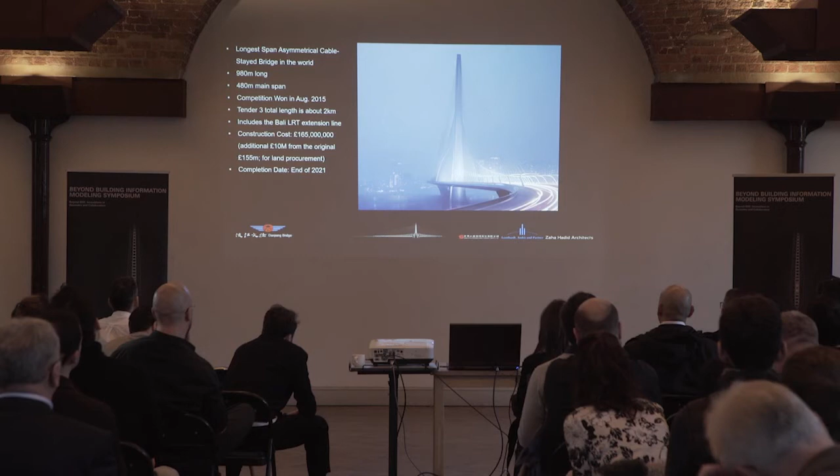Basically, just a little bit about the bridge itself. It's just under 1 kilometer long. The main span is half a kilometer. Completion date 2021, not happening. Reason being, and I'll mention this towards the end, has to do with the contracting process that had many, many difficulties due to the nature of the way that contracts are done on public projects in Taiwan, dealing with quite complex information sets, such as this one.

And what you have is this large bridge here, and the bridge is designed for car and vehicle access, but also for a light railway, roughly a tramway system that will be deployed in the middle of the bridge. So this is a span here between Danjiang and the Bali, which are basically on an estuary of the Tamsui River in the north of Taiwan.

So how many people here have seen the movie called Margin Call? If you haven't seen it, you have to watch it. It's about the 24 hours that basically caused the global financial crisis in 2008. Anyway, in Margin Call, there is a guy played by Stanley Tucci, one of the bankers who gets let go, and he says, in my previous life I was an engineer.

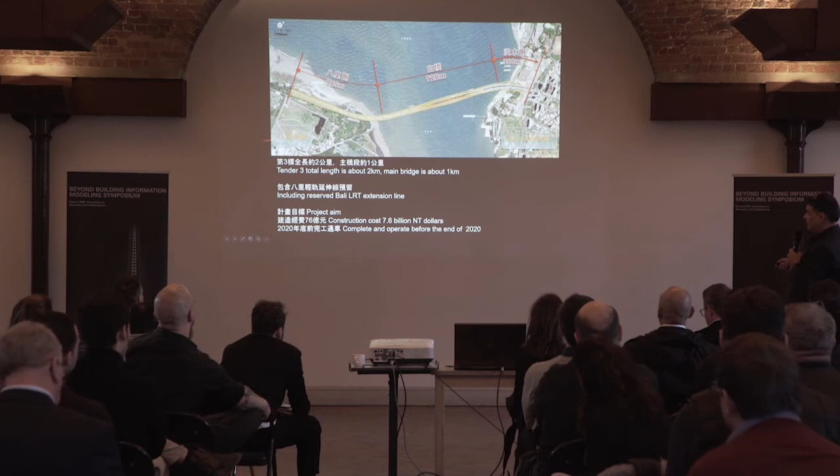And he tells a story of how he built a bridge in Ohio that allowed to connect people and saved, I don't know, an hour of travel time, and he calculated how many millions of kilometers of driving over those years had been. So this is exactly what this does. To get from Tamsui to Bali, I think it's like an hour and a half to drive all the way around to the other bridge, and this now allows you to close that loop. So it's a very important piece of infrastructure, even from an economic point of view.

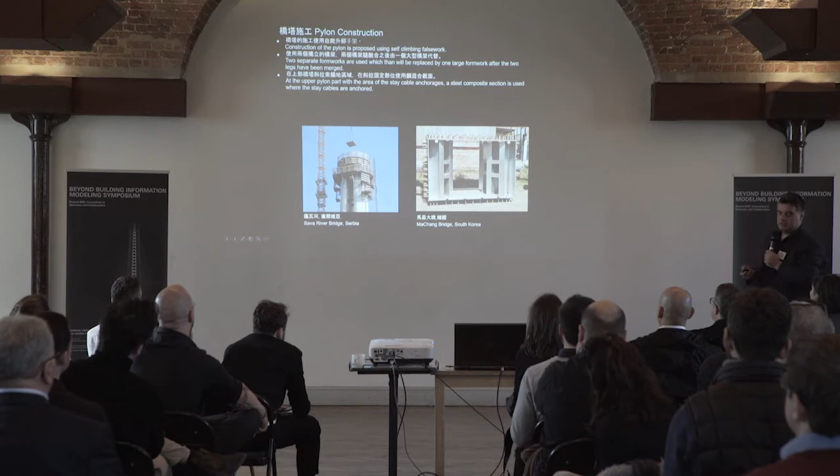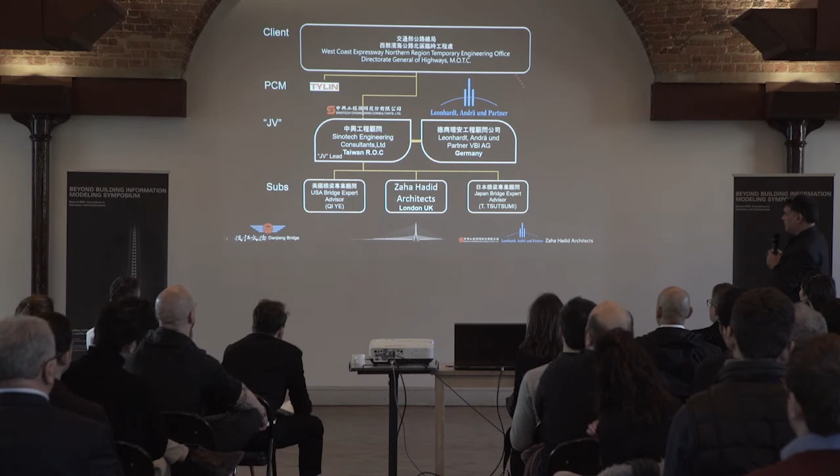The second point also, there was an issue of immediate constructability and explaining to the people in Taiwan how we were actually going to plan to build this so that in the end you could come up with a complete system where there's that complement between the bridge and the mountain. And there we go, now we can read this. So this was how this was arranged.

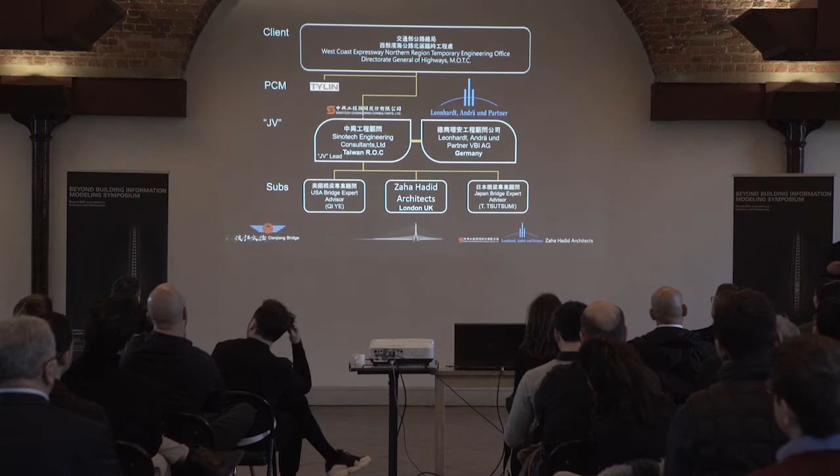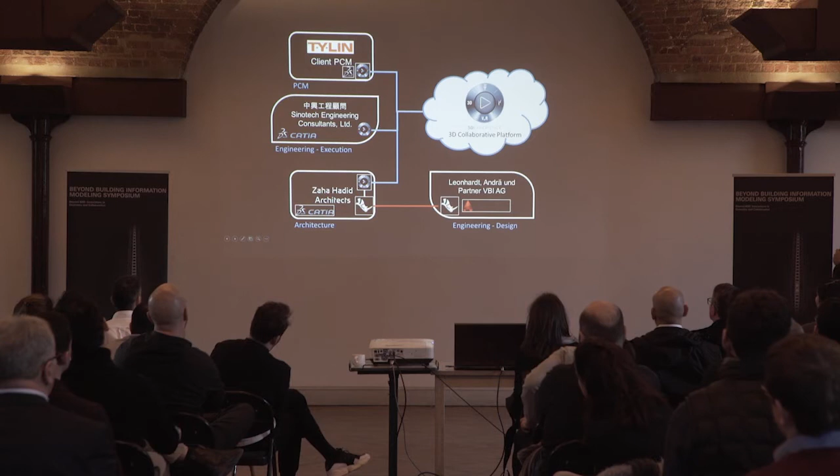So we have here a client body, which is the Ministry of Transport with their onboard engineers, TY Lin, a very famous engineering company. Because it's an engineering project, it had to be led by an engineering team. So the joint venture is between engineers, and as I mentioned, we played a very specific role that was not just the design, but also the whole 3D BIM integration process. So the idea was that we would have a design team that consisted of the three companies, Taiwan, Germany, and London, to provide a model.

And this model, it'd be nice if this thing went forward. Oops, I think this died now.

There we go. That we would then release it from our private workflow. This was what we were proposing to the Ministry of Transport, saying we have a master model that we can share with you.

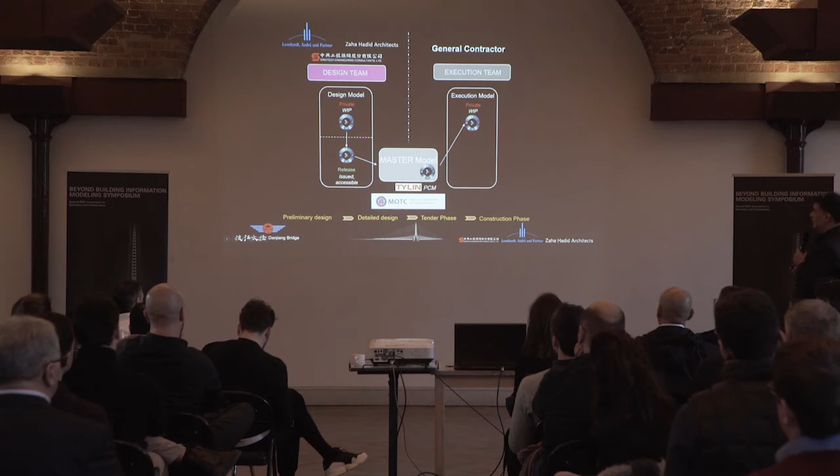And this eventually, when you procure a contractor, which they have finally done, and after many, many problems, which we'll explain to you why, you would actually then have what we called a master model we can share, where the contractor takes it on board and turns it into the execution model that is then released to subcontractors.

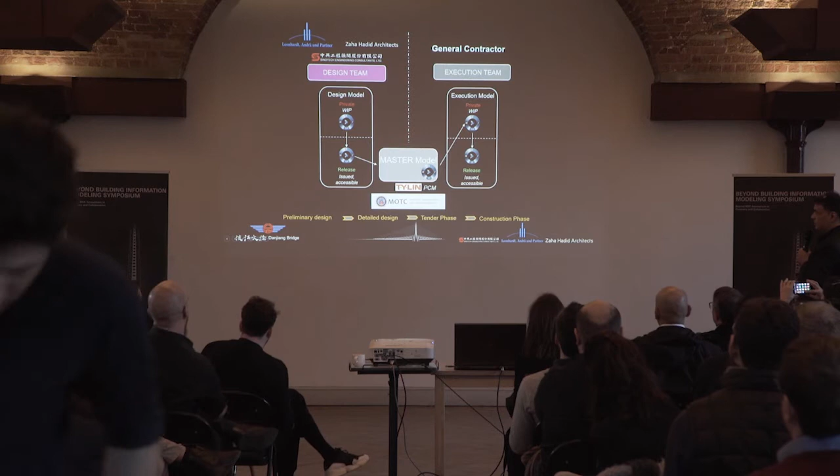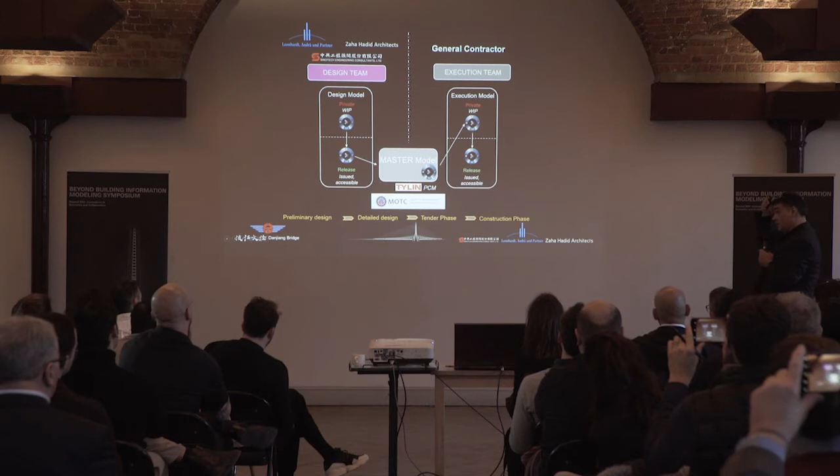So in order to get, I remember Boeing, right? We want to have authoritative data that we can manufacture from. In order to get the return on the investment that we are doing on building these kind of models, we want to be able to use it to the hilt, right? So this would then come out to fabricators, to the concrete contractor, and so on.

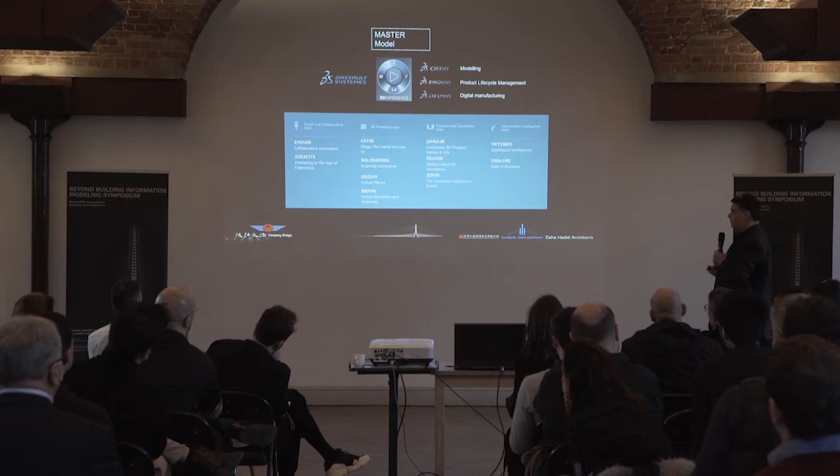So we looked at what platforms are available that are fundamentally understood in engineering. And one of the things that was very important is that, for us, we have a set of skills and, shall we say, tradition of using the CATIA platform in Zaha Hadid Architects. It has its advantages. Other tools have other advantages. One of the things also that we found that was really fundamental is that, without really asking, Sinotech was using CATIA as well. And they were quite interested in looking at this kind of distributed collaboration.

So the entire party here that you're looking at would not have happened if you'd not had two parties on either side, Zaha and Sinotech, that were willing to work together on a common platform basis. If you don't have that, you might as well not even get started, because it's just going to become a major headache. So we talked to Dassault, we talked to Jeff and to Patrick on our side. They then talked to their counterparts in Taiwan and looked at what is the infrastructure required.

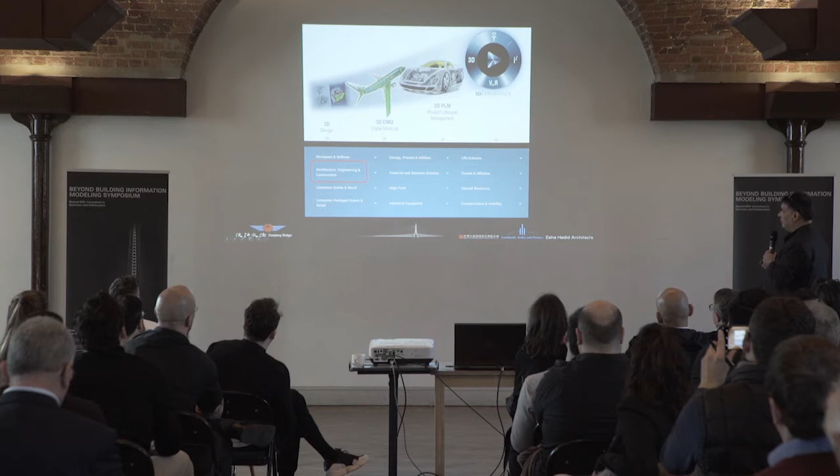If you remember the work that's been done in PLM and DMU in the airline industry, how do we integrate that across architecture and construction? Don't forget that this is really an engineering project, right? So basically there's a series, shameless plug here because we are talking about 3DX today, but there is basically a platform for engineering and civil engineering that became one of the mainstays for designing this together.

And one of the things that's interesting about this tool, the way that it's developed, this is a far cry from when I started using CATIA back in 1998, is that it now is first and foremost a platform for collaboration. And this was something that was very important to us. Remember what I said before about the Galaxy Soho project, about how do you collaborate across cultures? How do you collaborate across mentalities, ways of work? Having a common basis on which we can share information and track who's changed what and who's issued what became very, very important.

So this idea then that all the information is stored unequivocally in the cloud. We don't have this with Revit yet. This happens here by the very nature of the way that the tools are built. All the information must be not even file-based, but actually object-based, and it's stored on a common platform, which means that anybody who can tap into that platform, in this case our local partners and then the contractors in Taiwan, has access to the information.

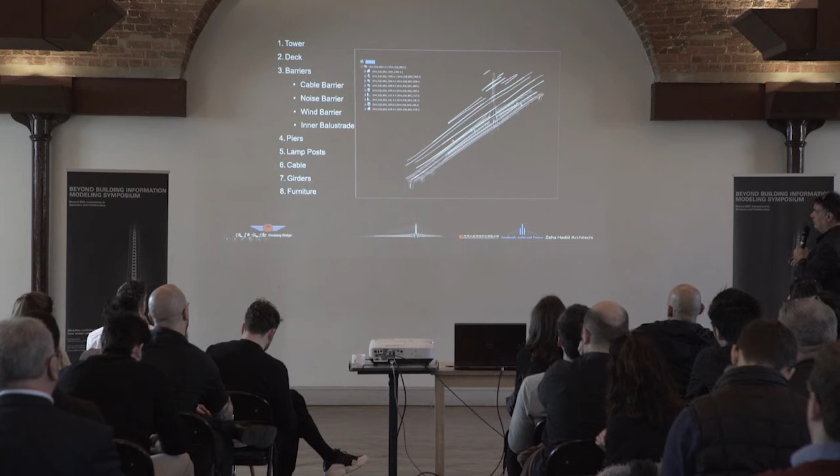So similarly to what I explained before about the airport in Beijing, again we have a series of logical assemblies. We have the tower, which is the main mast. We have the deck, so this is concrete, this is steel. We have all the barriers and furniture that we have in there. We have then lampposts, cables, girders, and so on. So this becomes the basic assembly that allows us to systematically and hierarchically build a bridge, right?

Because this is a true engineering project, we're not dealing with things that we're dealing with, say, on the airports right now: fire safety, evacuation, egress, coordination with the baggage system. I think a lot of people from the Navi team are sitting in the audience today and are all nodding wearily. Here we have really a very logical assembly of components that each speaks to and represents a particular trade, a particular subcontract, either steel, concrete, or otherwise, that enables the bridge to be built. So this is a logical view of the assembly.

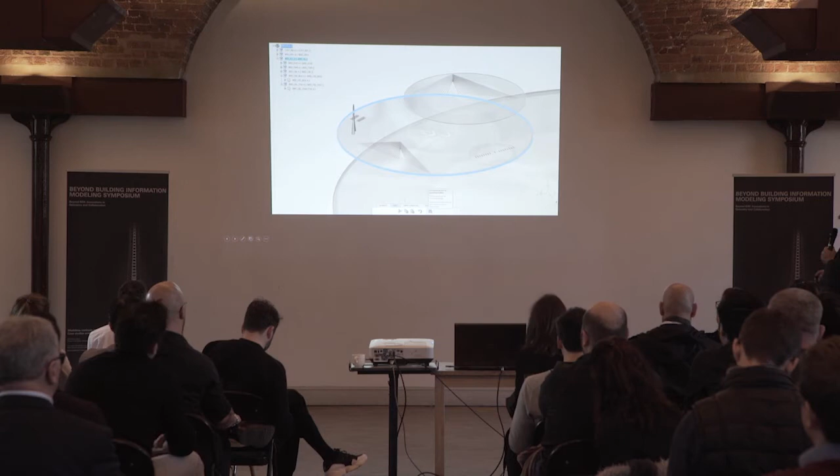So if you put this all on the 3DX platform, it has this funny, I'm sorry, it is kind of funny, Lazy Susan. If you go and eat dim sum in Chinatown, you know these, right? I'll have a bit of egg rolls and a bit of whatever, and this thing flips around and you got the stuff. It's kind of funny, right?

So what did we put in the model?

So we put basically the whole of Taiwan, or most of Taiwan, in the model, just to give us at least the north of Taiwan. We have the city of Taipei here. We have here the Danjiang Bridge at the estuary of the Tamsui River. And just for comparison, here we have the Taoyuan Jichang, which is the airport in Taoyuan. This is where Richard Rogers is building the new Terminal 3. And the city of Taipei in between those.

So this gives a sense of scale, and then having an intermediate site resolution, which then allows us to place the bridge, including both bridge heads, and do the engineering for that, including foundations. So the entire bridge is modeled on this platform. You'll see the level of detail we get to here.

There's no other software that I know of that can do this, because of the way that it manages memory, and the way that it moves between, again, it's a whole other lecture, between a virtual representation mode and the way that it actually calls up, shall we say, the actual modeling modes. The way that it manages memories and representation is pretty unique.

So it combines, say, what Revit and Navis do in different platforms, it does it in one. That means you can switch very quickly between working on a model, coordinating it or visualizing it without having to download all the stuff that goes with it.

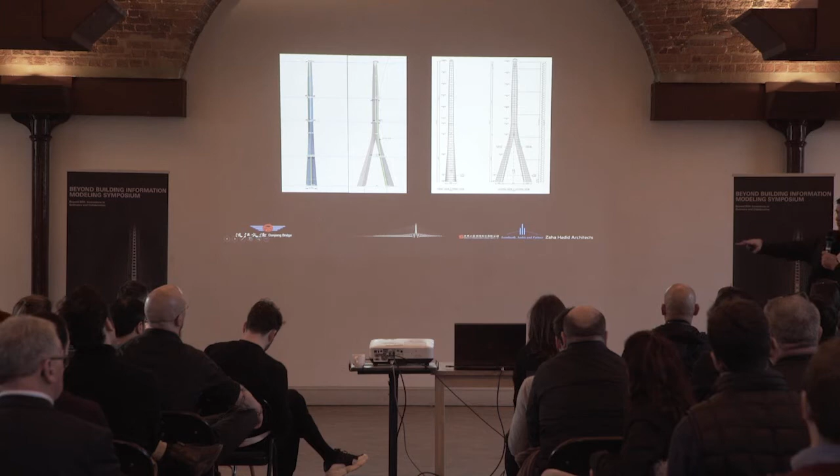Now, if you go around London, you see they're building lots of towers, you'll see slip forms going up, and they're building the same core, it's the same slip form going up, up, up, and it doesn't change. Here, it's continuously changing. That normally means you would have to build a mold for each one of these segments. It gets more difficult because as we started doing analysis on this, we find that even if we rationalize this, there's a dirty word that gets abused today.

If we start looking at its constructability and say, well, what it's really about, it's not so much about the concrete, it's really about the geometry of formwork. So if I can control the formwork, I can control the geometry. In this case, we're looking at various instances in the original design. If we had more time, we'd go through this on other projects like Galaxy.

But basically, if you have the general case of different segments on the base of the footings, where you have a convex section, and then it switches, you see, from the convex to the concave, that transition incurs a shift in Gaussian curvature, right? So this means that we are no longer dealing here with any kind of developable planar surface, but actually we have to look at how do we simplify the geometry so that we can build it within a certain cost framework, because we have this curvature shift.

If you know the mathematics, it's basically differential geometry, 1 over the product of the largest and smallest curvature radii. That will give you a certain number that will tell you if this can be met by a particular material elasticity. So that has to do with, are we going to make these formworks out of phenolic? Are we going to make them out of wood? Are we going to make them out of steel, which drives the cost way up?

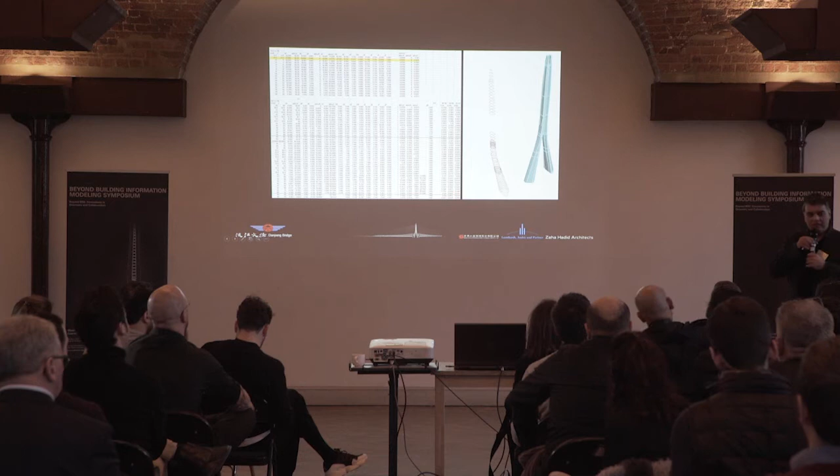LAP, who did all the structural engineering calculations, worked with one of the smartest people I've ever met, a crazy guy in Argentina named Manuel Miguel. This guy only works in AutoCAD, and as a structural engineer, he writes this crazy C++ code that calculates sections and outputs it from AutoCAD into drawings and into an Excel spreadsheet.

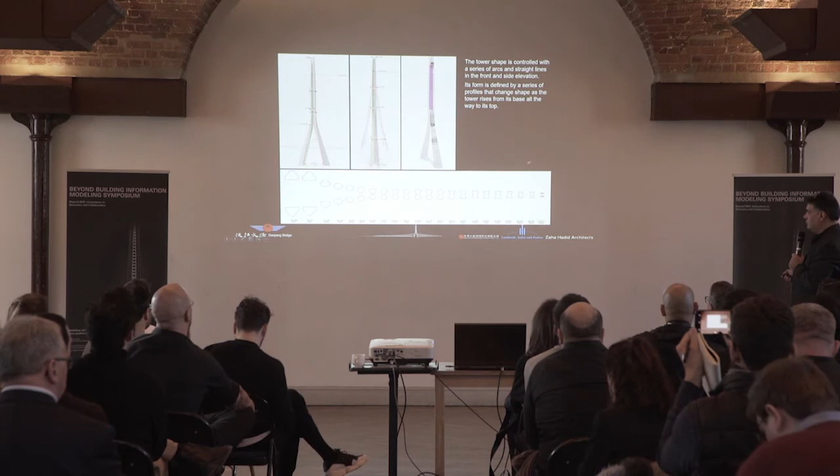That spreadsheet interfaces with Sofistik, the structural engineering tool used by LAP. It brings it into AutoCAD, does the mathematical calculations for the sections, outputs them, and then we had to reference his sections into our design to check that we would implement the structural engineering requirements so this thing would perform as required. This step is really important because it's about marrying structural engineering performance with aesthetic design intent.

We did not want this — if you just left it up to them, they would have just drawn a simple stick, like other cable stay bridges we saw earlier which are geometrically a bit simpler. Here, we really wanted to maintain the fluidity of the geometry.

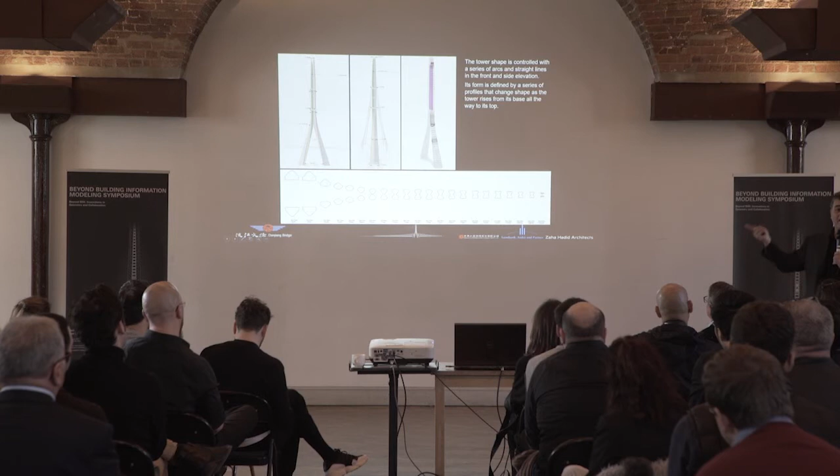The important thing here is how we were able to verify that back to Taiwan, confirming this actually implements the structural requirements that make this a seismically safe bridge.

The platform also acts as a very powerful review tool, so we can mark up and continuously submit comments back and forth between ourselves and our partners.

The breakthrough that allowed this project to happen was a collaboration we had with PERI, possibly the most advanced formwork fabricator on the planet. This is Mr. Brunner here at their facility near Augsburg in the south of Germany, very well worth a visit. Mr. Brunner, basically their evil genius, developed a variable geometry formwork.

You can use this on slip forms, slipping up the side of a building — in this case our tower — controlled with digitally controlled strand jacks. As it moves up, it changes from convex to concave using a standard slip form construction method. This was the most important thing to demonstrate to our clients: the possibility of building this tower without a single bespoke mold for each segment, but rather with one adaptable system.

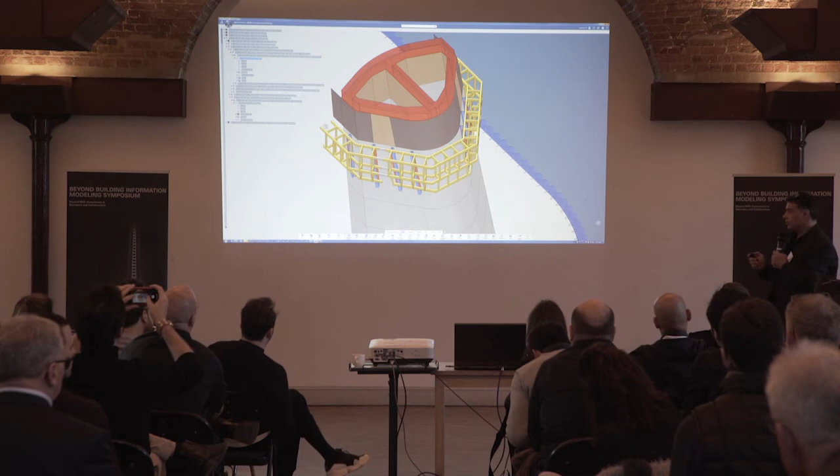The proof is in the pudding with the variable geometry formwork we put forward, so much so that the client made it a requirement for the contractor to demonstrate they were able to do this, since it fulfills the design intent.

So if we start going up the building, here are some shots of the model — I'll mention what's happening with the construction in conclusion. You can see here the structural steel plates, which I'll talk about in a minute.

These are dampers that connect the two fairways of the bridge, where the cars and the railway ride, into these stabilizer beams that have dampers which take up any movement of the bridge, so that if you're driving across, it's not all wobbly and weird.

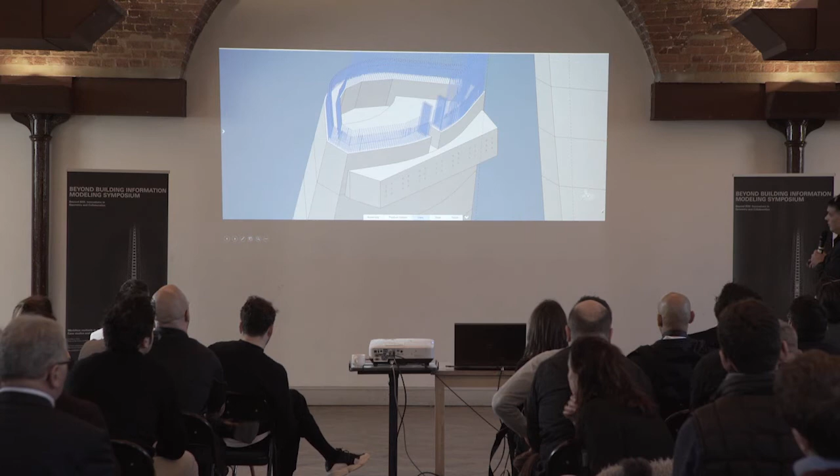You can see what's happening here — the model we designed built all that formwork logic developed in collaboration with PERI into our own completed concrete model. These are the ties drilled in. Remember, these are true solids — this is not a representation, it's a one-to-one virtual twin.

You can measure the volume of concrete here, and measure the pockets where concrete is removed. Most importantly, all the rebar here is done by our engineering partner in Taiwan, Sinotech.

Each one of these, every single piece of rebar is modeled in this model. And that means that because these are true solids, I can actually select all this rebar, measure its volume, multiply it by the density of steel, and I know exactly how much steel I'm using, or linear length of rebar, or whatever. Now this is required because it's an engineering project in Taiwan.

Remember, this is under the engineering directorate. We have to demonstrate every single piece of rebar before we get the go-ahead to be allowed to do this. So to have this level of information in the entire project, I don't think there's any other tool that could have done this, where you can just open it, flip it around, cut it, section it as ever you want to. This is the reason why we went down this path.

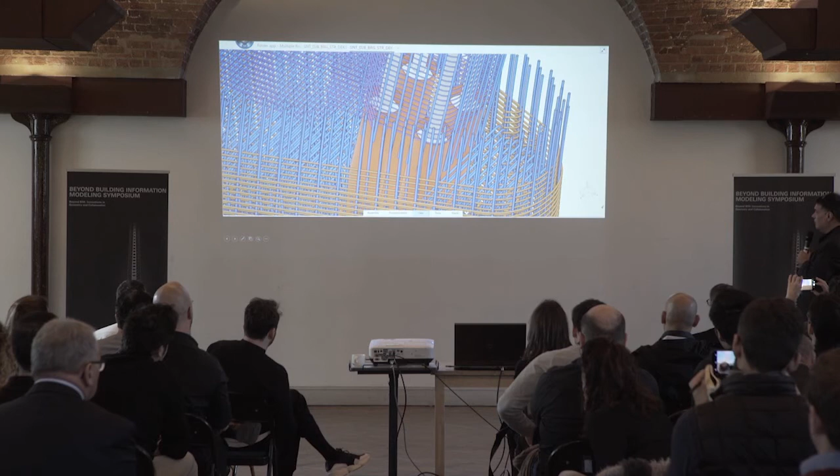Okay, as you can see here, these are the cages, the rebar cages with the rebar ties. You see inside here then we have large tension rods that are cast within to provide pre-tensioning of these towers.

I see Rob May nodding. He's like, we can go through the structural engineering stuff.

So this goes right down to the ties of the rebar, right? And you can open this model and you can zoom in and out, and the system will allow you to do that and load and offload whatever it's not showing. But we needed to have this level of definition, and I'll explain to you why.

Because you need to show every single one of these rebars in a drawing when you're going to tender. So if we're going to draw all of this, and that's where the proof is in the pudding comes later, it gets quite a lot of documentation.

So again, here we have the X side of the bridge, the tower. You see here, these are the cable stays, these are the sleeves cast in. In the middle of the tower, we have a giant steel box that goes up and provides the main stability for the tower. It's like a giant concrete core, steel core. So think of it as one giant SRC, steel reinforced concrete, to which the cable stays are actually tied.

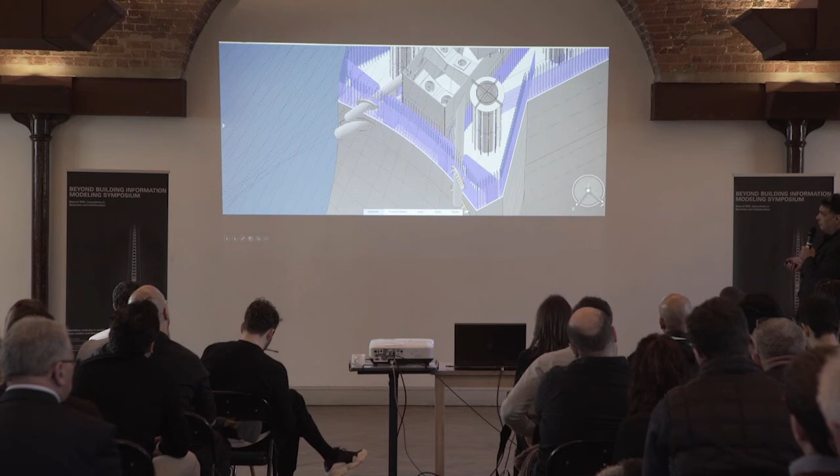The same holds true for the pylons. So this is then the concrete pylons underneath the bridge. So when you're reaching the bridge itself, again, same calculation of the formwork, analysis of which parts can be simplified into flatter developable sheets. Where do we have double curvature, which was an important element of the design to be maintained.

So this is then, again, our geometry designed in-house, which is passed over through the virtual collaboration platform to the Taiwanese team, who then start providing all the detailing. Right, you see the rebar starting to come in, and then again 2 hollow core sections here in the pylons.

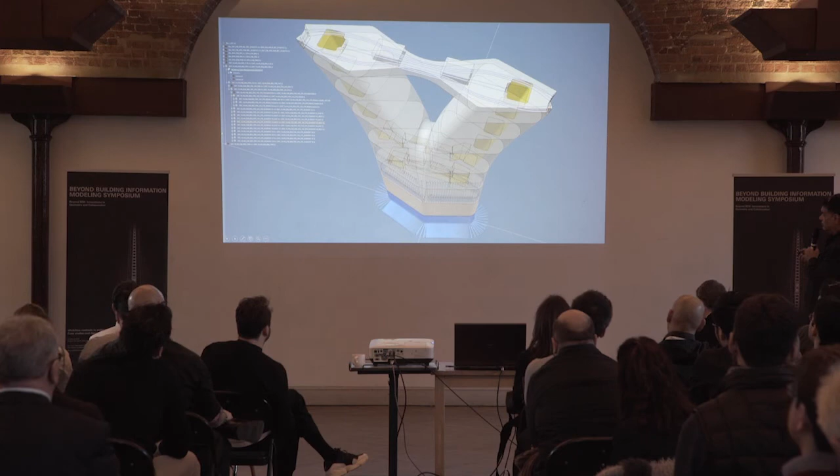All the work of the modeling that you see here on our side of Zaha Hadid Architects was done by 4 people. The core team was 3 with an augmentation of 4. That's all we needed to do the entire project. And so that's very efficient, right? If you look at how you spend your fees and your profitability, that's a very good way of doing it.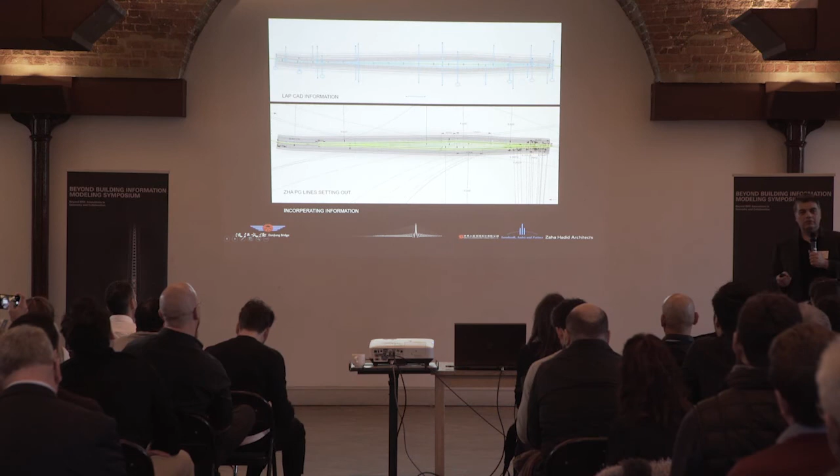These curves are very special curves. They're called clothoid curves. I don't know if anybody of you knows, but it's basically a curve that very smoothly transitions from zero curvature and begins to adapt the curve. Would you like to add something to that?

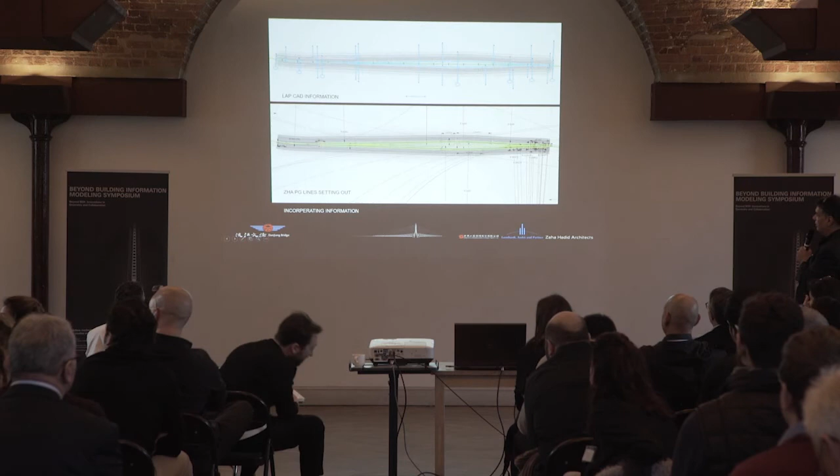And what happens is we then have a series of adaptable sections. In this case, it's a section of the entire steel profile of the bridge that has a series of constraints built into this that make sure we always have the drainage implemented, we always have the right dimensions implemented, and this then adapts as we move it along and cast it in each location of each segment of the roadway.

So you see there's a lot of detail in this model, all of this was added to it. If you look inside, these sections are done as shipping technology. These are steel plates which have access hatches already built in, pre-assembled and prefabricated and brought to the site by barge and lifted into place.

We have this other end now, the cable stays. The cable stays here are now welded here within, providing the other end of the tension of the bridge.

So this is what I wanted to show. These are other LAP bridges that show you roughly what's involved. This is a cable stay. The roadway is built in sections, brought along by barge and lifted into place. And when they lift it into place, they then attach the cable stays. It's really interesting.

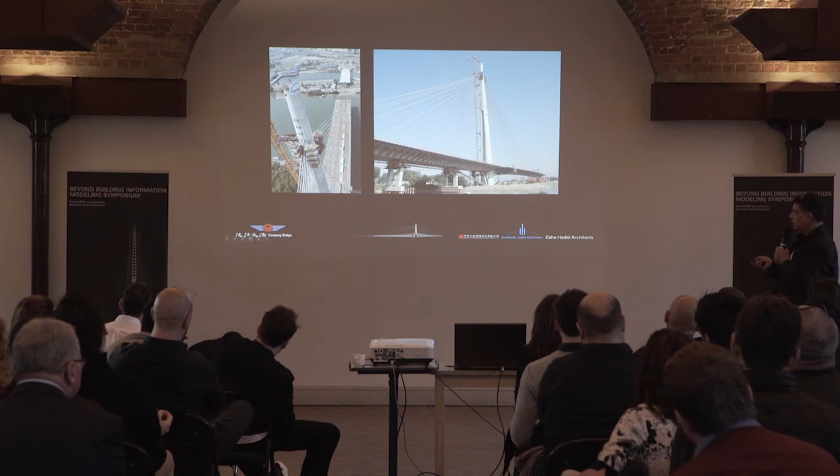We went to see this. They were finishing a bridge in Scotland, and they have to do it side by side. So you see this is a problem, right? This is a standard cable stay tower, and you can see the slip form segments. Remember, ours instead are changing in geometry as we go up, like so.

One of the things that we modeled, for example, that was really quite impressive I thought the team did — you have not just all the cable stays, but remember that the cable stays have a sag. So the actual cable stays are not straight, but deviate into a curve, and that curve coefficient is something we modeled because it allowed us to get it right.

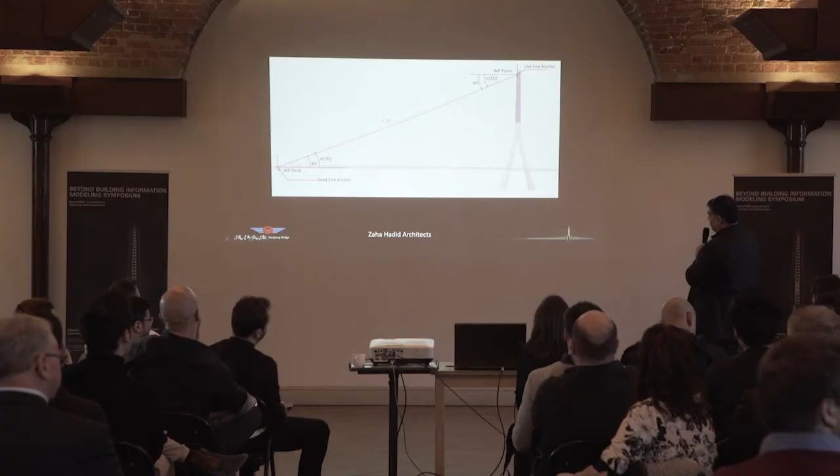So you see there's a sag here, there's a delta. And this sag is very, very precise because it's actually not a straight line, but has this sag that takes up slack in the movement of the bridge. So it's that level of precision of modeling.

This is coming through what's called a design table. A design table is basically a connection between Excel information that's coming from the engineering team back straight into the modeling, so that it's actually accurate. By having these accurately modeled ties, the contractor can very accurately estimate what information and quantities are required to get this built.

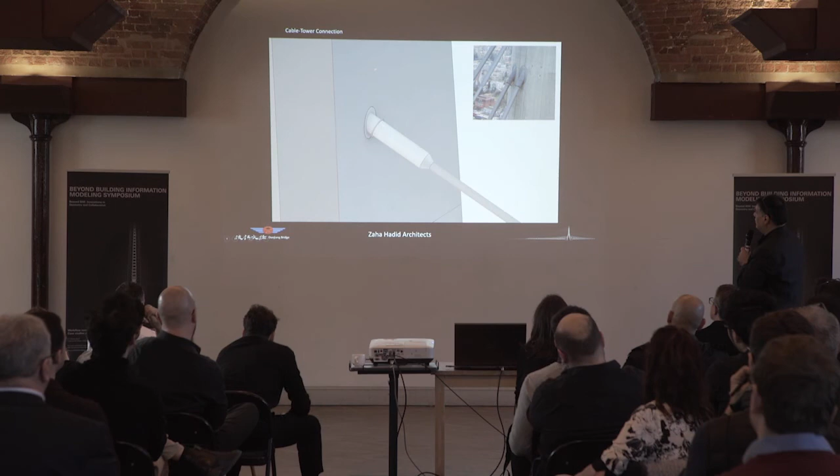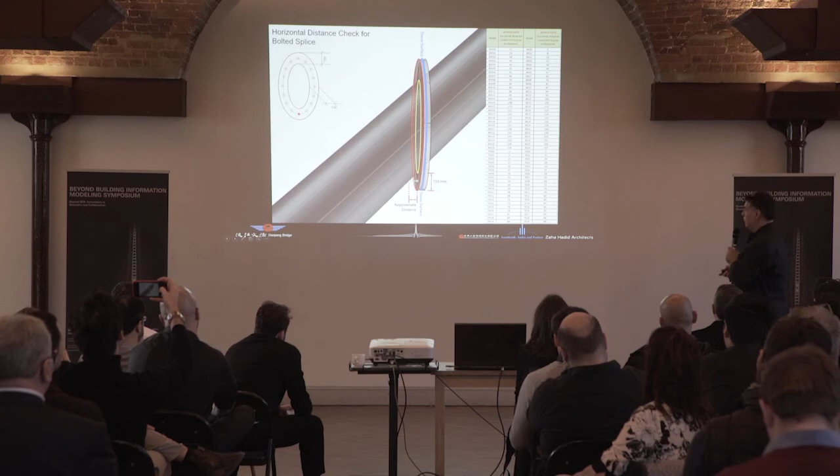So if we go down into the bridge, there's a lot of stuff, right? You see there's bicycle racks, wind barriers, furniture. Because we wanted this to be a complete project, we actually modeled every single bit. So we have here railings.

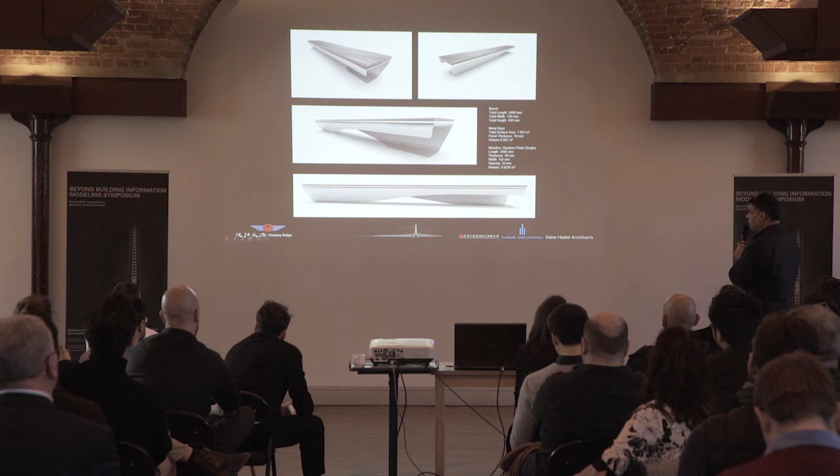This was done again all through constrained geometry development. We designed a nice bench made of a curved steel plate with wood on it for people to come and sit down and see the sunset. We even designed the bike rack because we're crazy, so we designed our own bike rack.

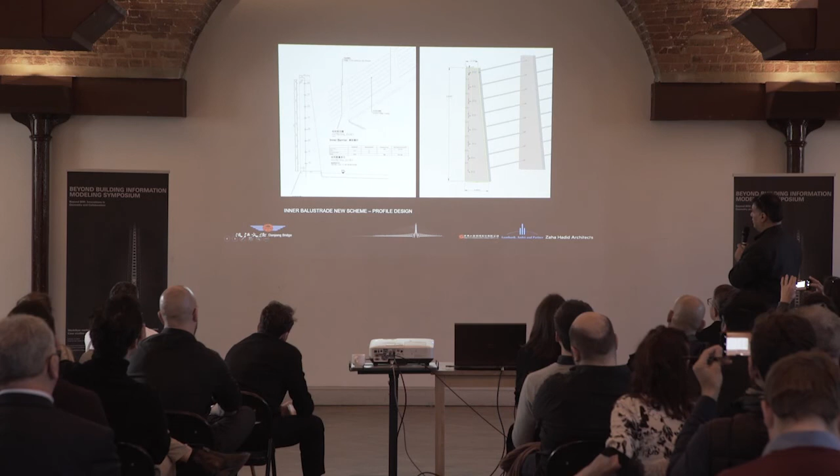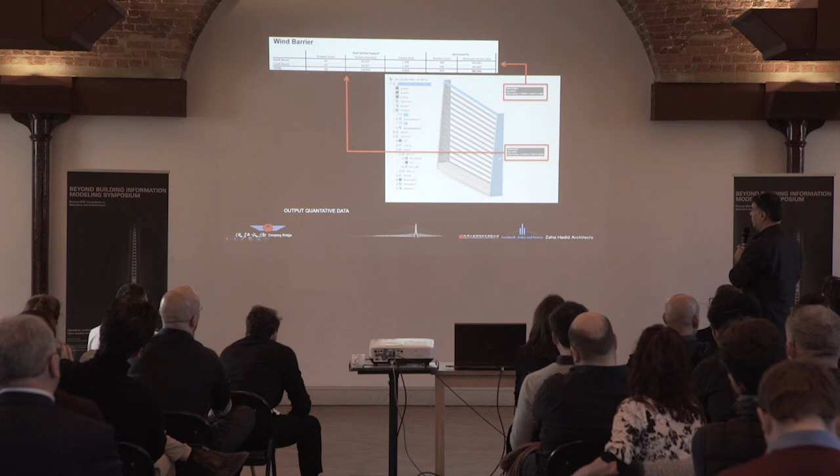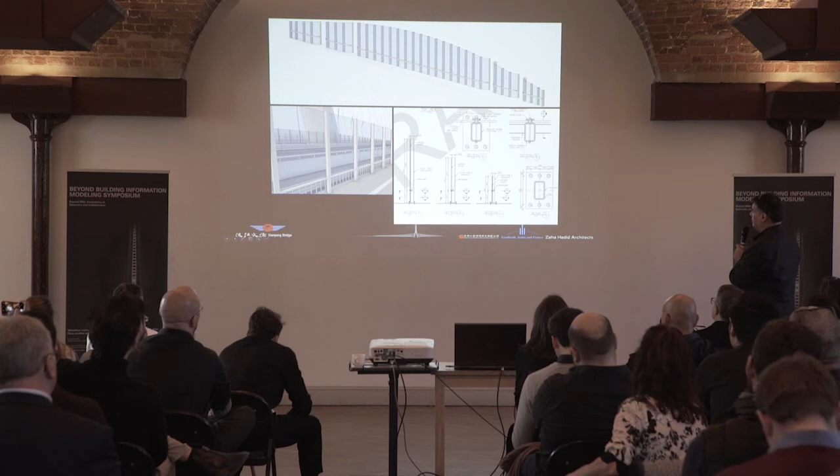And then these are additional balustrades for safety, and wind barriers that deflect the wind. It gets very windy there, so you don't get blown away while walking across. All of this is in one model. And finally, these are also acoustic barriers — big acoustic walls, so that when you're standing there you're not blown away by all the noise.

This leads me to the final bit. Because this is a public project in Taiwan, we advocated very strongly that you should take the model — all the information is there, down to every nut and bolt — and execute directly from the model. Unfortunately, they said no, in Taiwan we have to submit drawings. So we produced all the drawings directly from the model.

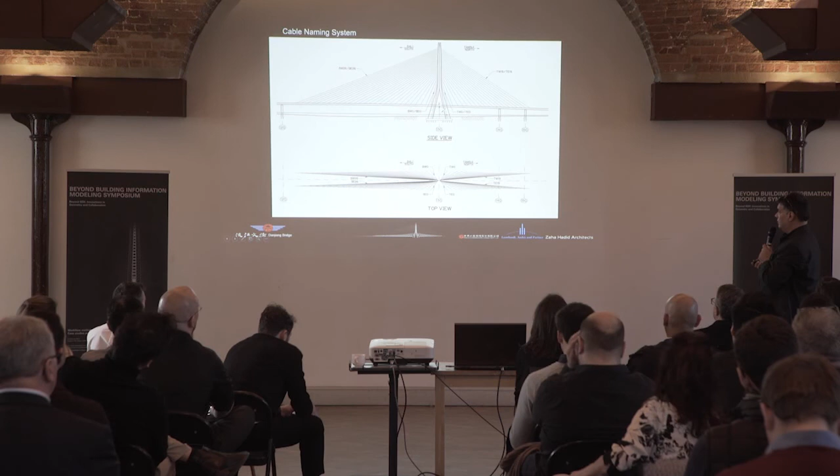These became the basis of the architectural drawings, coming from the live model, so as previously mentioned, any modification we make updates here. But they then became the basis for the engineering details. So all that rebar you saw still had to be put onto 2D paper, even though nobody will ever look at it again.

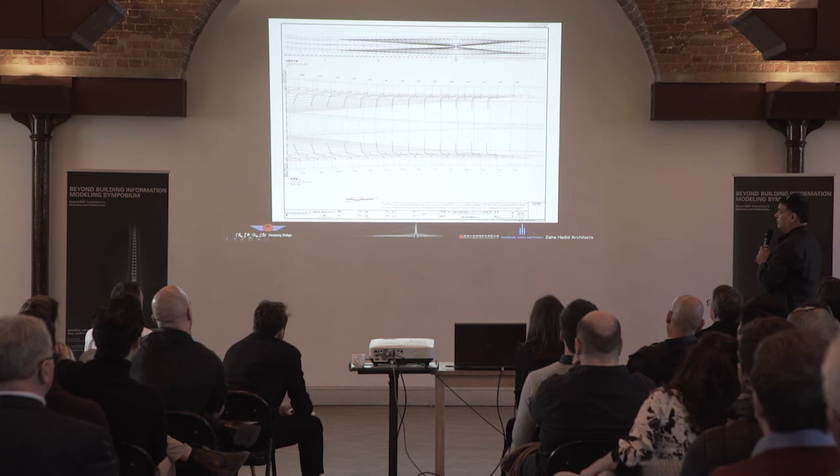So you see here, this is a plan view on different A0 drawings because this thing is so big — all the geometry for these bent light posts.

So this is what I want to conclude with. One of the reasons this project was delayed is because they had to go out to tender six times, and they all failed. I think on the seventh try we were able to get a tender. So that took almost a year and a half.

Now, why did it fail? Because all the contractors in Taiwan, because they all know each other, did not agree on the budget being proposed. And as a result, they all got together for dinner and said, none of us are going to bid. And you needed at least 3 contractors to bid, or the tender would be declared invalid because you did not have enough vendors. This went on 6 times.

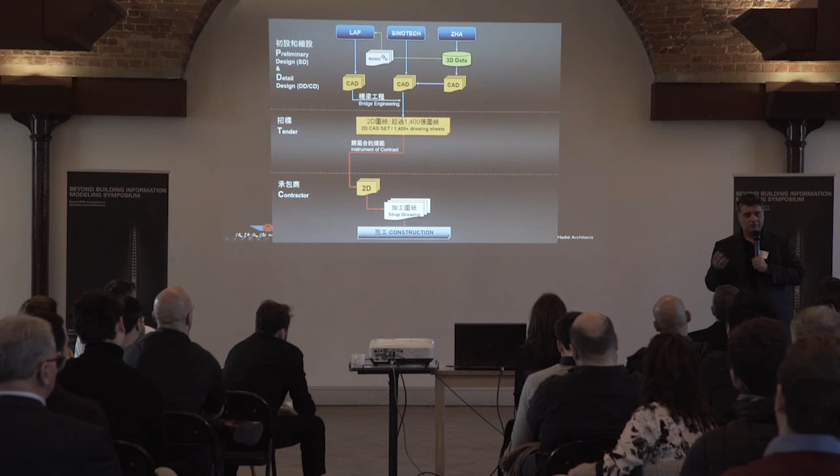As they got to multiple times, the requirements were reduced, and finally a contractor emerged. Each time, the government upped the ante with the budget, and finally we had a contractor. So the government said, this is how we are going to build this building, like this. So here is LAP and Sinotech and Zaha. We are managing all the 3D data.

Sinotech and Zaha were working off the Dassault 3DX platform. LAP chose not to because they were really only working on the pure mathematics of this. So that was interfaced via Sofistik and Rhino to those CAD drawings that you saw. But each one then had to put out their own CAD drawings, which Sinotech completed, and the entire project is over 1,400 drawings. When you chop up that model, you get 1,400 drawings, and that is, by law, on a public project in Taiwan, the instrument of contract.

That goes then to the contractor, who then generates their shop drawing, but the government said, we need you to run it off a 3D model. So they said, we want you to take this stuff and build your own 3D model. And as you all know, the chances of this 3D model and that 3D model looking the same are 0, right? So that is a problem. And also the amount of wastage every time there's a query is insane.

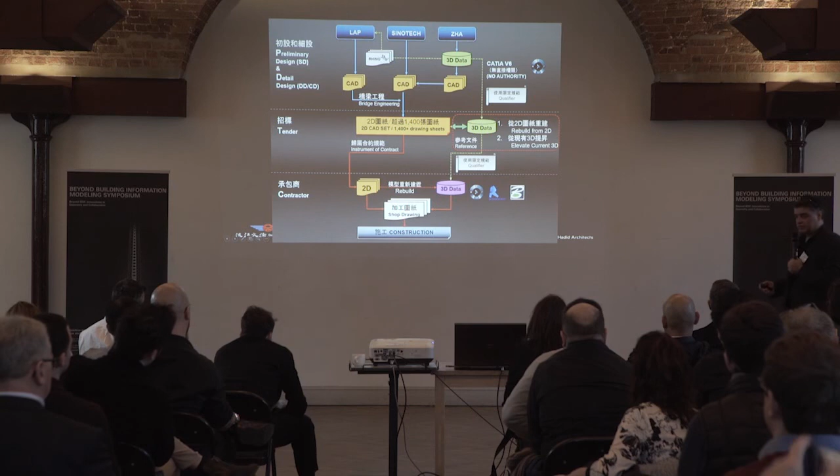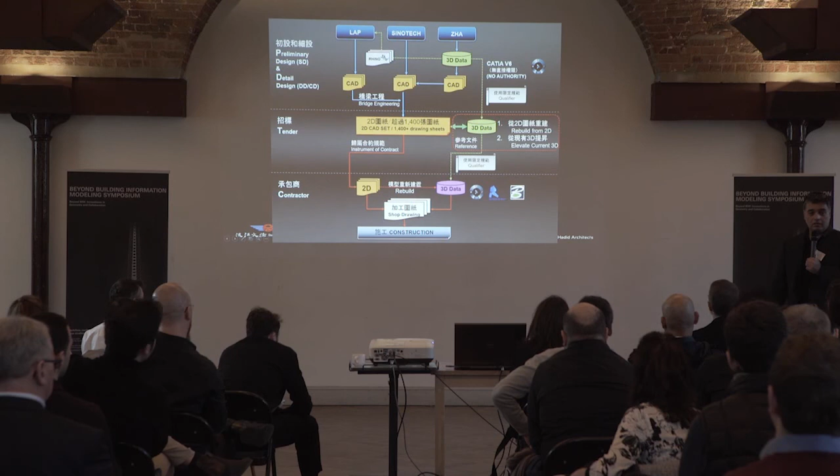And ultimately, if there's agreement, use another qualifier where that model is taken directly into the contractor's modeling environment. You bypass all this stuff, don't chop down as many trees, and basically you take the geometry straight through. Now, the process of getting this accepted in a government body in Taiwan has taken about 2 years, and we're still not quite there yet. The reason we're getting there is that the contractor says, of course, it makes total sense, because instead of having 20 guys rebuilding models off of millions of drawings and constantly checking back, I'll just take this, we'll verify it, we'll save lots of time, and off we go.

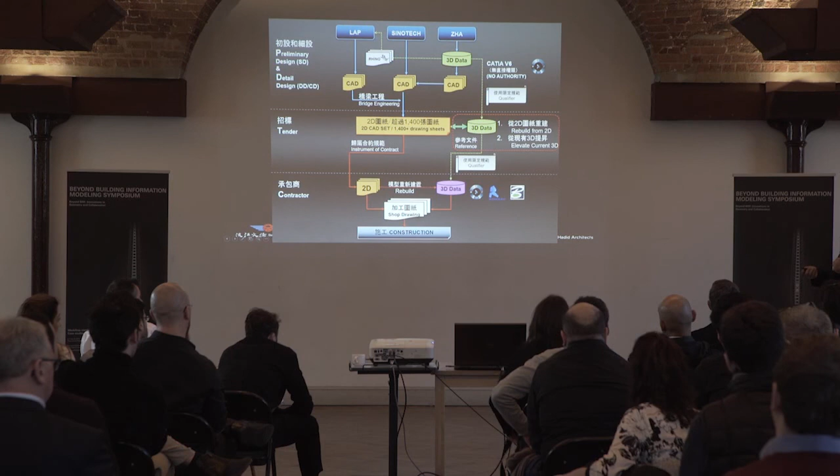So it is an issue. It goes back to the human component of how do you massage and control a process like that, where technologically it's there, it's just that the legal framework isn't there. So in conclusion, we're now just waiting for groundbreaking. We're waiting for the president of Taiwan to come to the groundbreaking ceremony, which has been moved twice because she's very busy, but hopefully that will happen on the 14th of March now, next week.

Until then, they're looking at souvenirs. You can buy the bridge like this. You can have a beer coaster. You can have a shopping bag, a tote bag, and wait for the bridge to come.